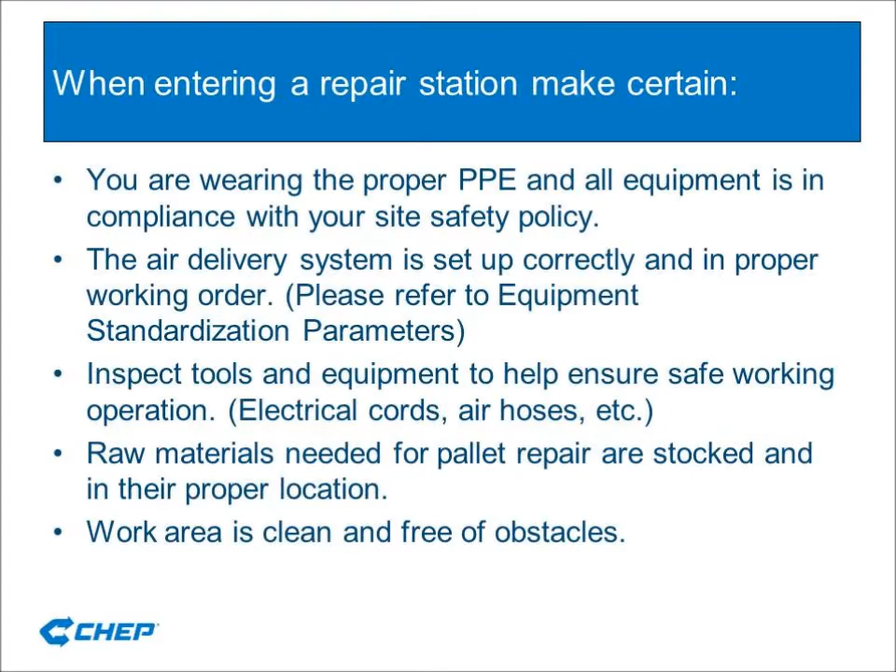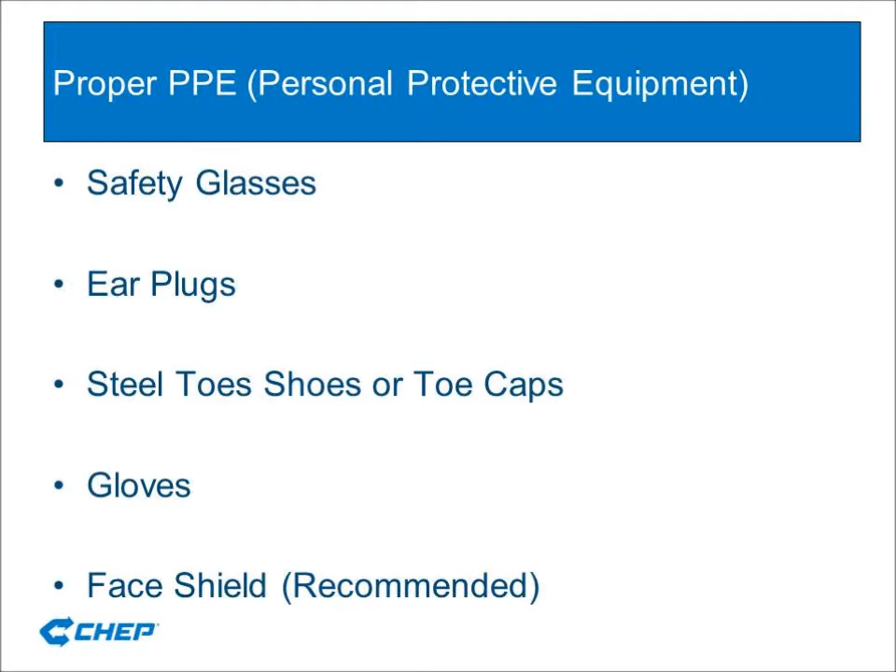Personal protective equipment: safety glasses, earplugs, steel toe shoes, gloves, and face shield. A face shield is recommended but not required in all repair centers. Check with your local management team for PPE requirements.

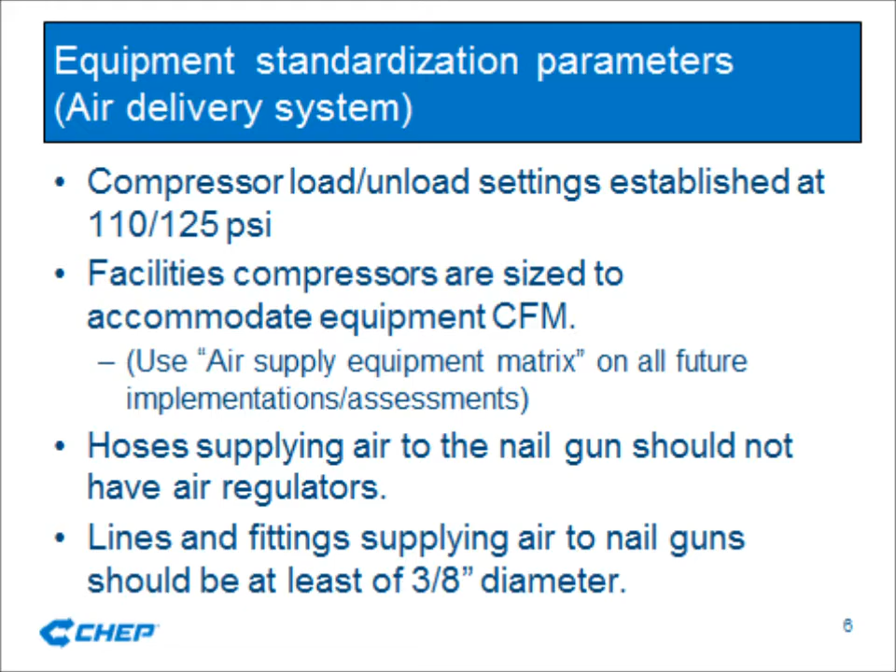Equipment standardization parameters: the compressor load, unload settings established at 110 to 125 psi. Facilities compressors are sized to accommodate equipment CFM. Hoses supplying air to nail gun should not have air regulators. Lines and fittings supplying air to nail guns should be at least 3/8 of an inch in diameter.

Proper nail coil loading. Step 1: disconnect tool from air supply. Always disconnect air supply before making any adjustments, clearing jams, reloading nails, and when tool is not in use.

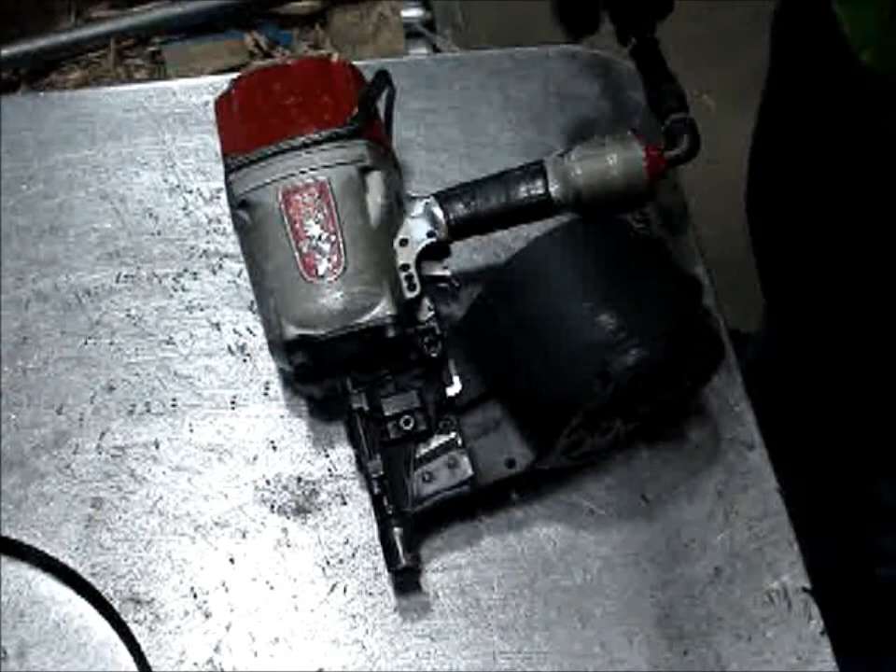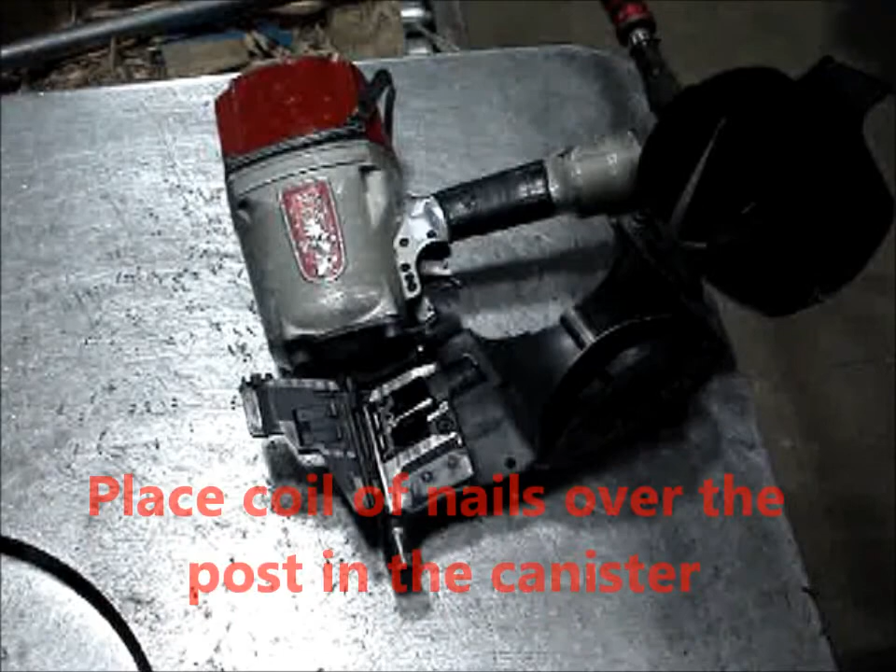Step 2: unlock the cover and open the nail coil cartridge. Step 3: place the coil of nails over the post in the canister. Step 4: uncoil enough nails to reach the feed pawl and place the first nail in front of the front tooth on the feed pawl in the driver channel. The nail heads must be in the slot in the nose.

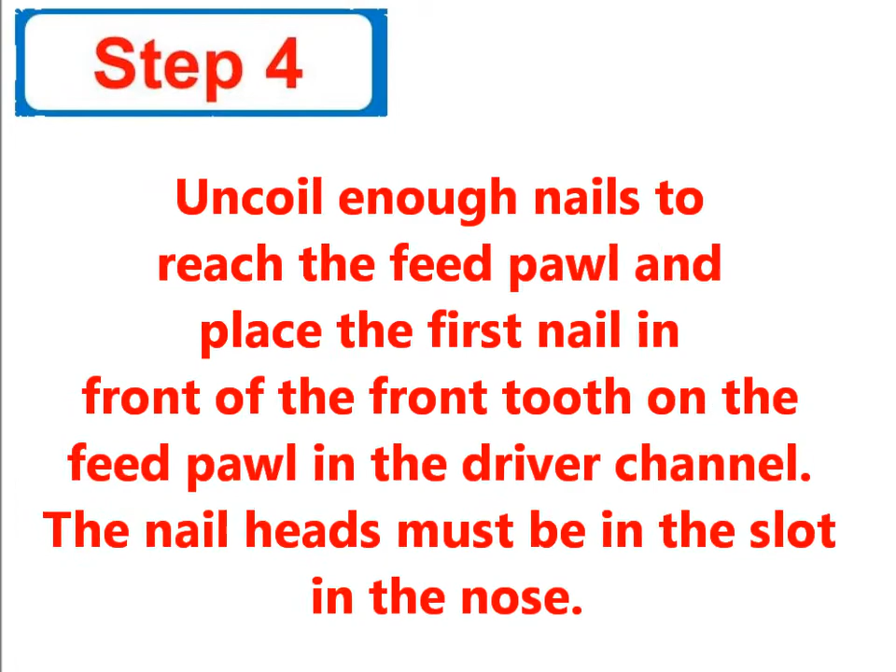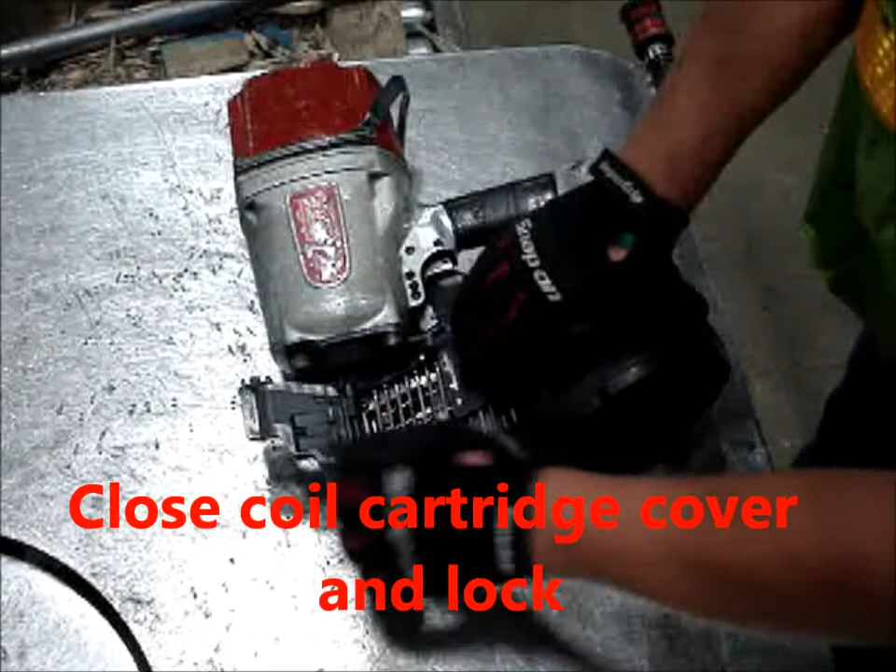Step 5: close coil cartridge cover and lock. Step 6: reconnect tool to air supply.

Proper screw strip loading. Step 1: disconnect tool from electrical outlet. Step 2: to remove empty strip, pull from the top of the nose piece.

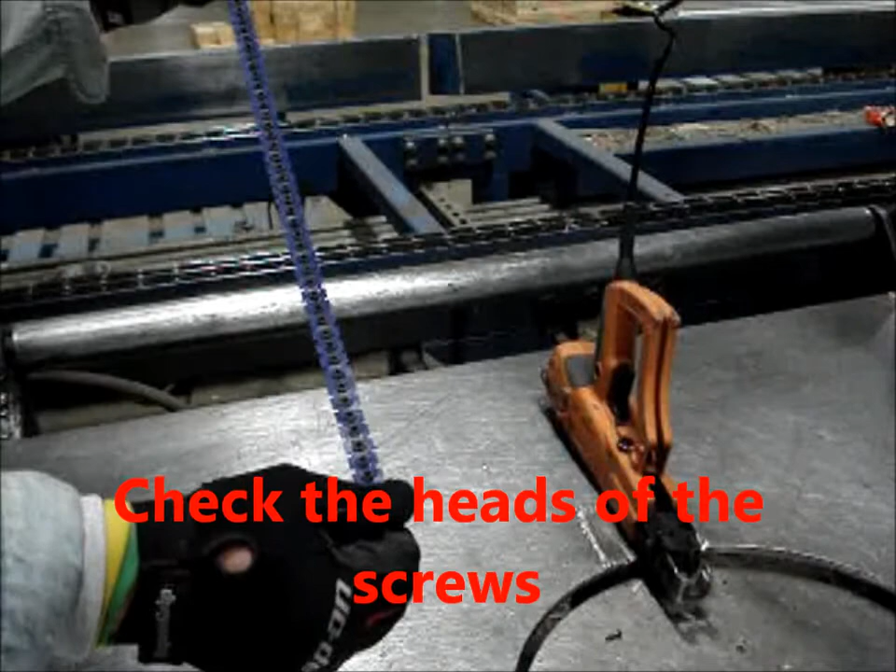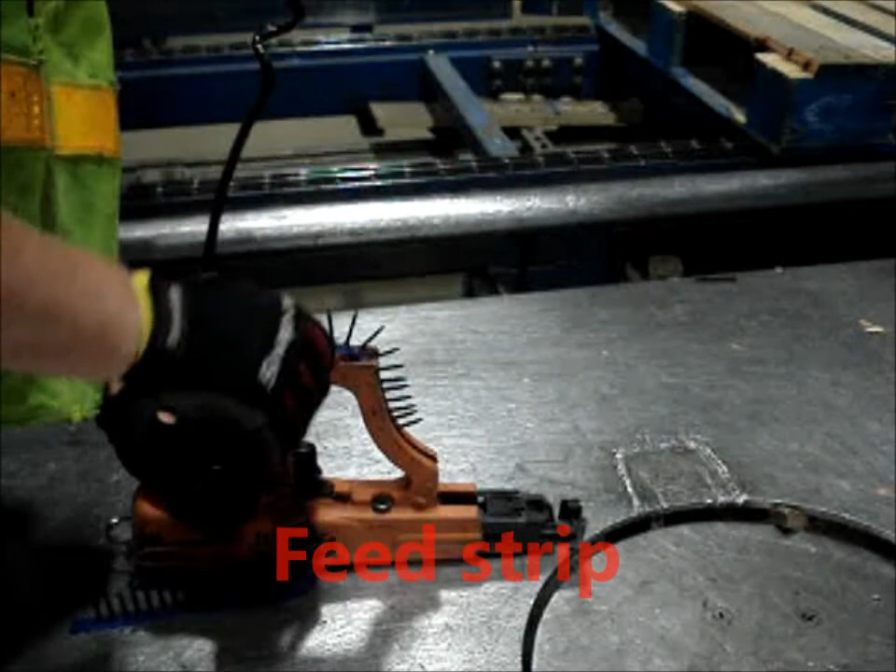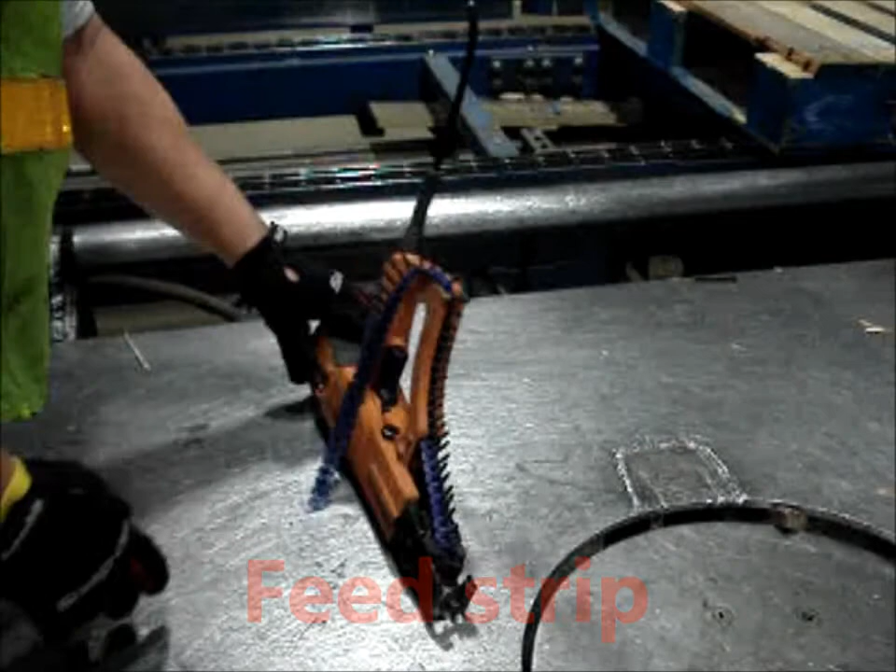Step 3: check to be sure the heads of the screws are resting onto the plastic of the new strip. Step 4: feed the strip up into the strip guide, moving the strip forward until the second empty slot is aligned with the bit. This will allow for the proper strip advancement once the nose piece is depressed. Step 5: reconnect tool to electrical outlet.

Proper nail and screw gun technique. Always grab the nail or screw gun with both hands and point the trigger perpendicular to the board's surface. Avoid excessive nailing. Excessive nailing may damage the components and reduce the durability of the pallet. It also increases repair time, which contributes to higher cost.

In some cases, nailing at an angle may be appropriate to prevent further damage on a loose board or block. Follow the required quality criteria.

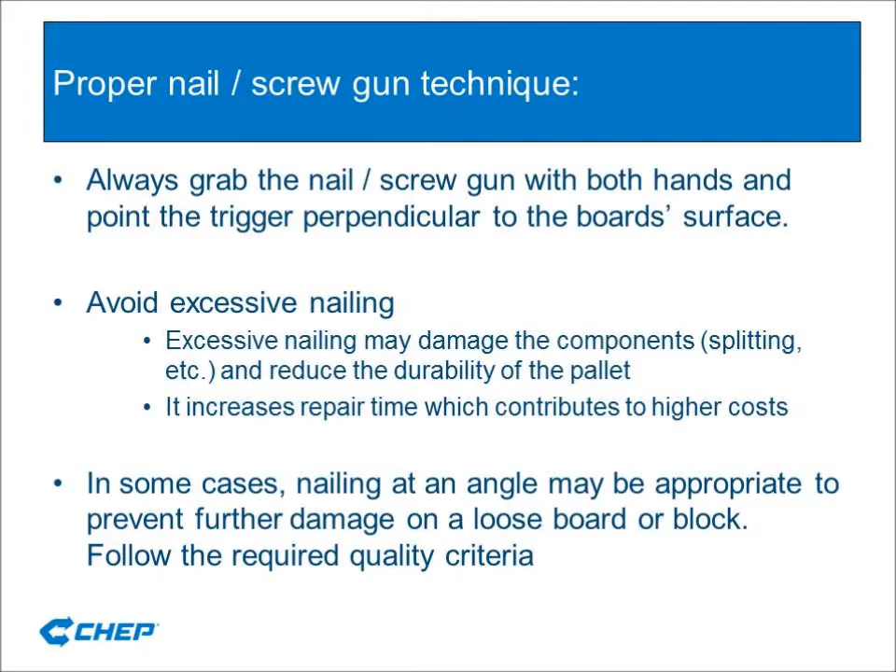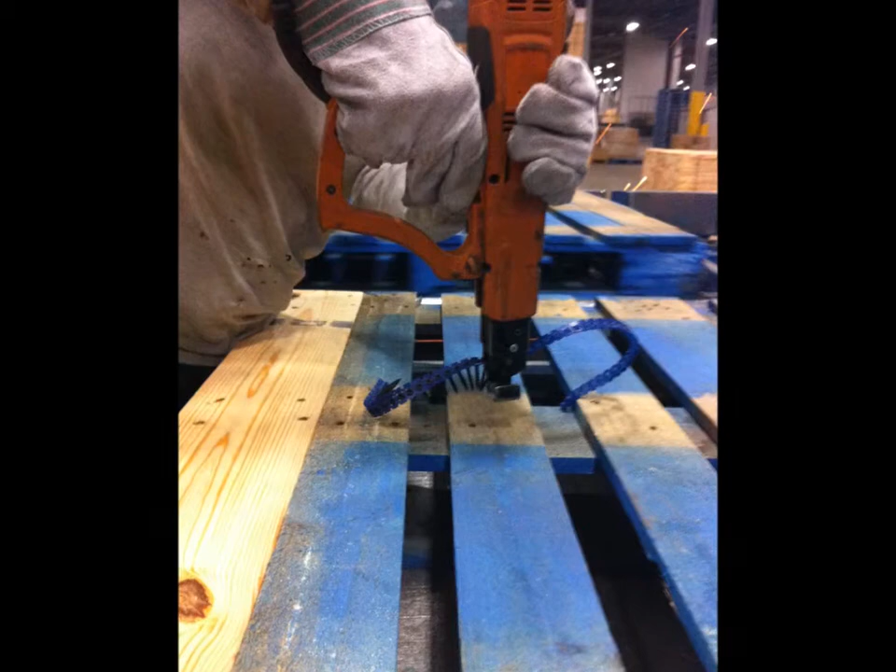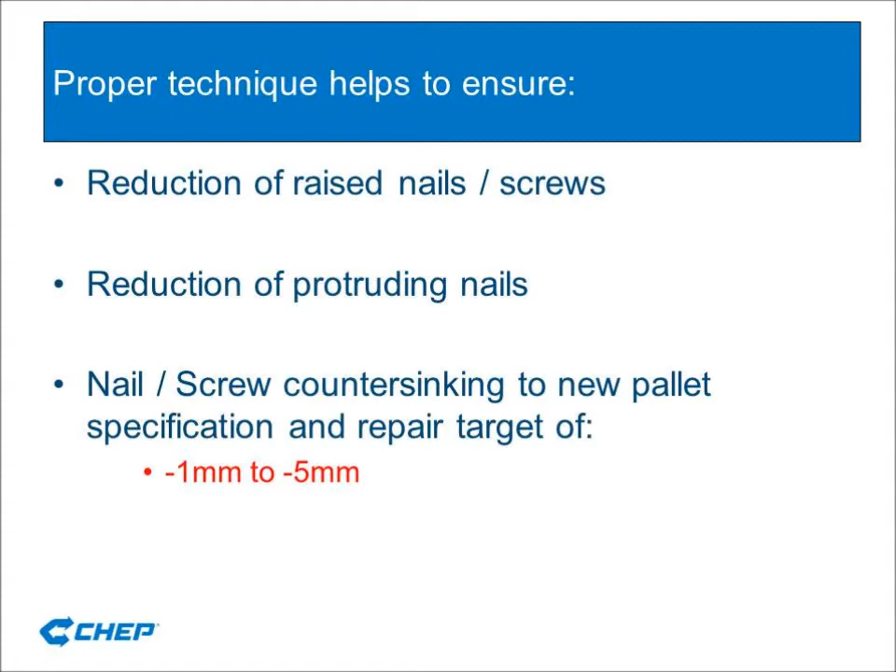Nail and screw countersinking is critical to avoid raised nails. It is also one of the top CTQs for our customers. Use the gauge to check the nail depth consistency in your service center.

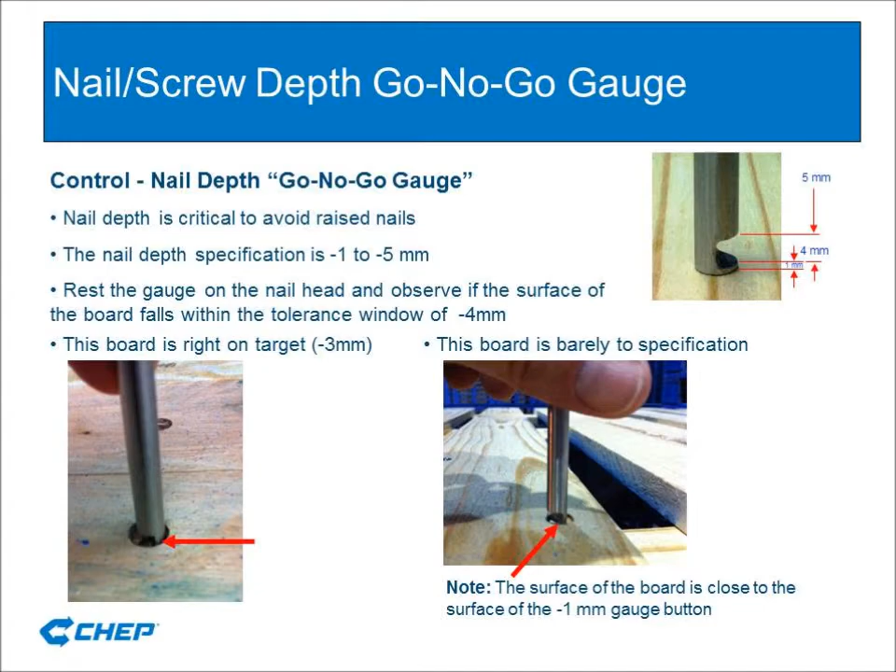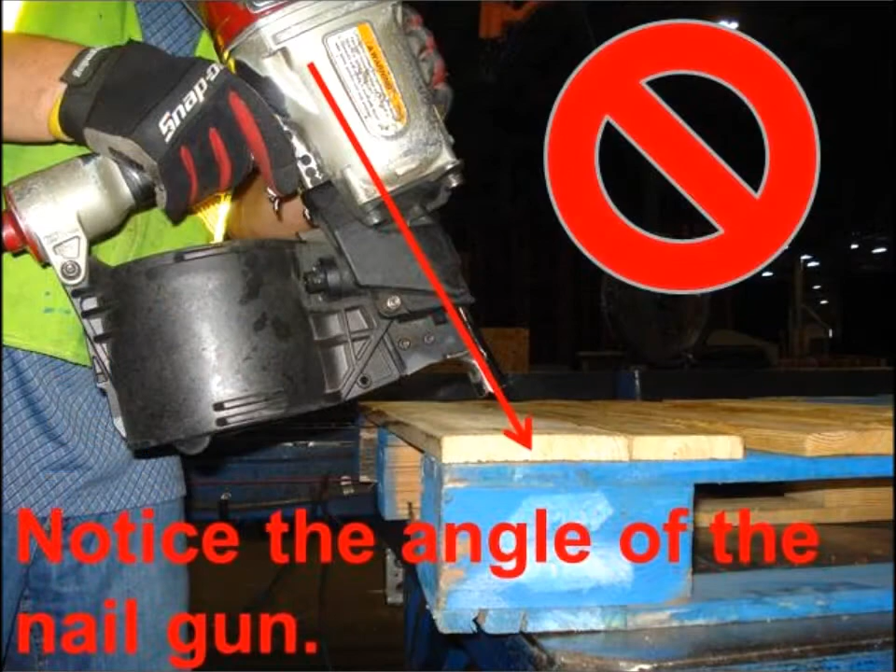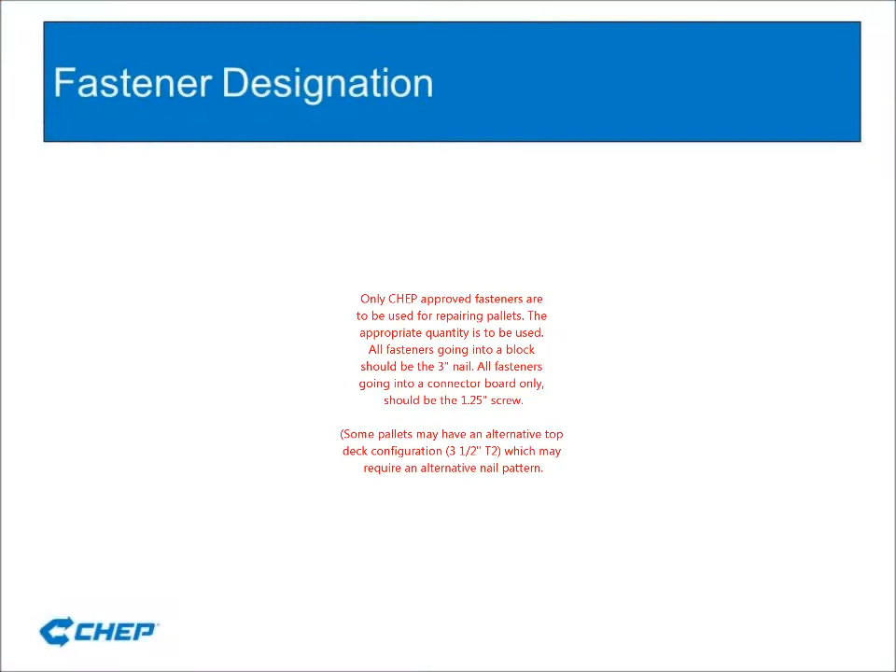Fastener quantity and pattern. The following information refers to the B4840 pallet. There are other types of pallets which will require a different fastener type, quantity and pattern configuration. Only CHEP approved fasteners are to be used for repairing pallets. The appropriate quantity is to be used.

All fasteners going into a block should be the 3-inch nail. All fasteners going into a connector board only should be the 1.25-inch screw. Some pallets may have an alternative top deck configuration, which may require an alternative nail pattern.

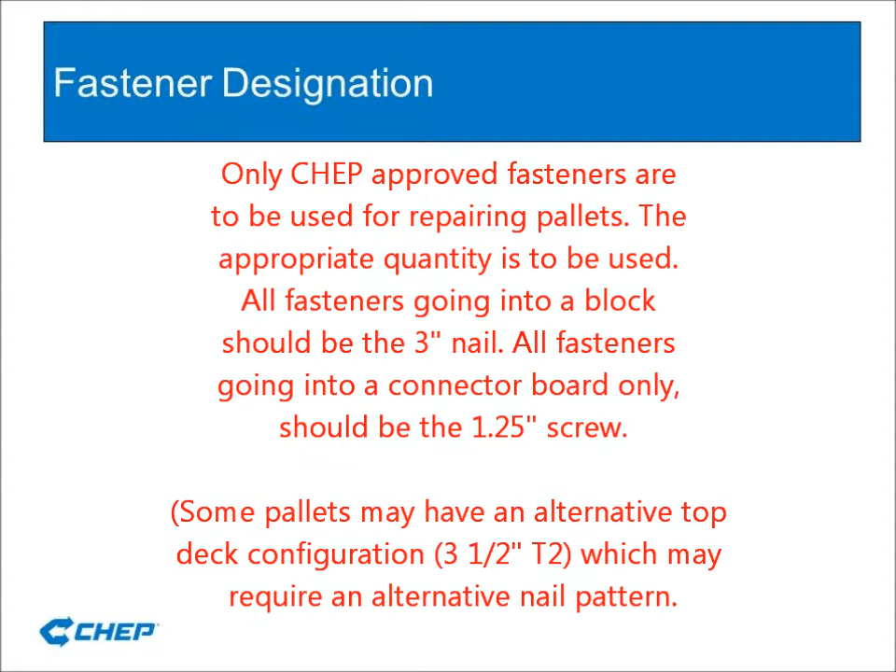Fastener quantity per pallet, top deck: 81 or 75 total fasteners, depending on the pallet configuration. T1: 4 fasteners per joint. T2: 4 fasteners per joint if the component is a 5 1/2 inch T2, and 3 fasteners per joint if the component is a 3 1/2 inch T2.

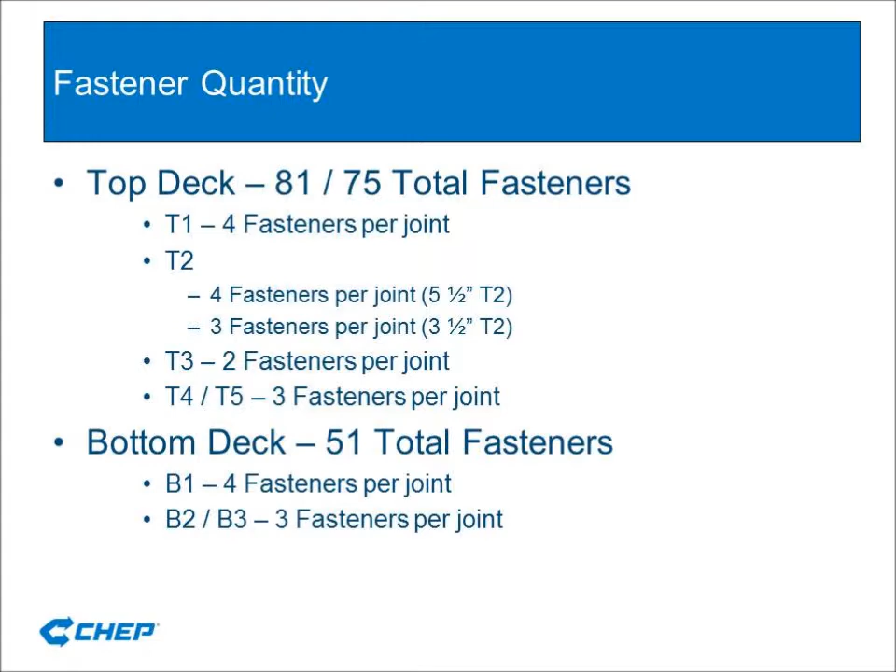T3: 2 fasteners per joint. T4: 3 fasteners per joint. Bottom deck: 51 total fasteners. B1: 4 fasteners per joint. B2 and B3: 3 fasteners per joint.

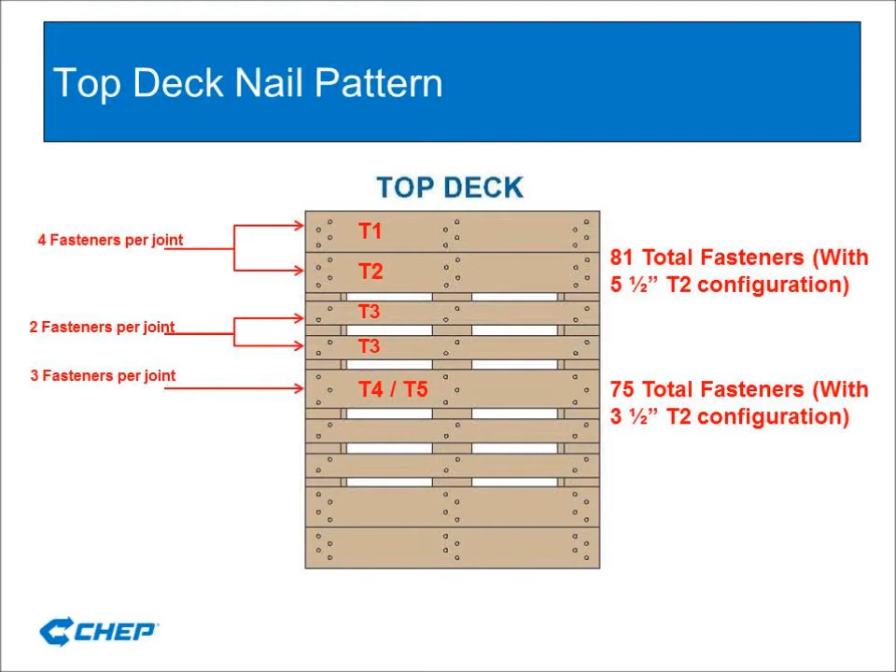As you can see from this top deck configuration, with a 5 1/2 inch T2, there are a total of 81 fasteners. The bottom deck of all repair pallets require 51 total fasteners.

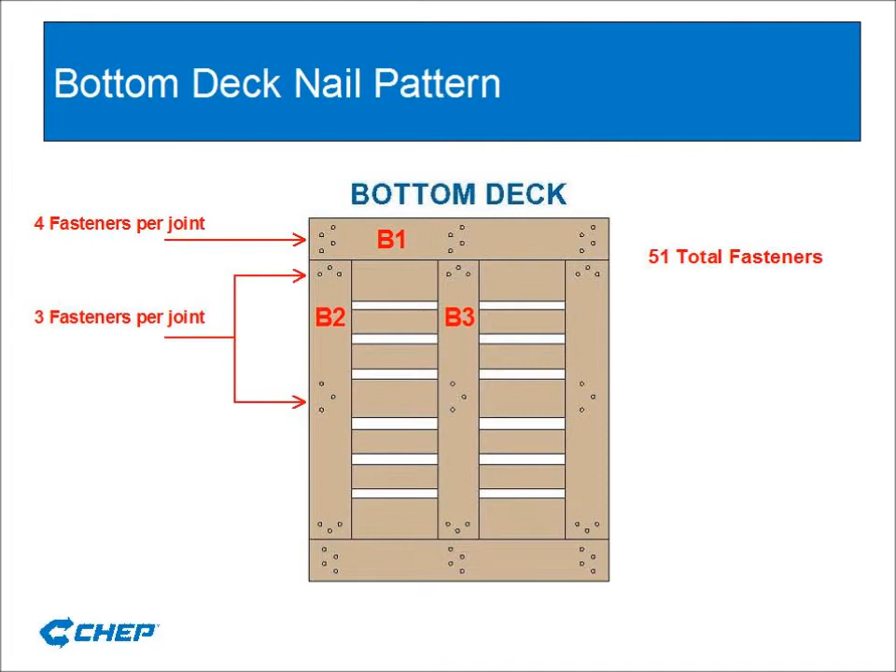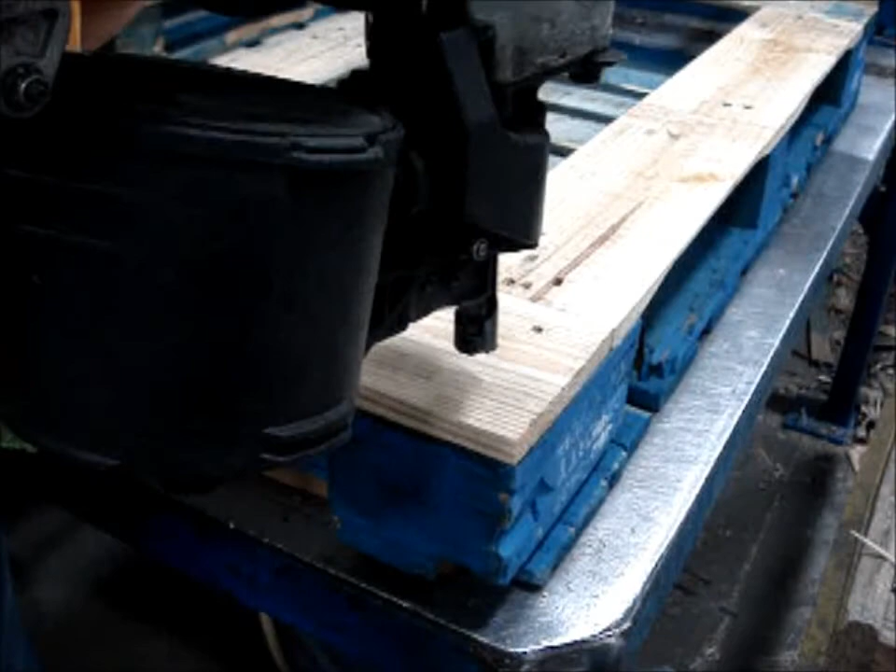B1 nailing technique. Observe how the operator has both hands on the nail gun, and the trigger and nose of the nail gun are perpendicular to the board.

B2 nailing technique. Keeping the trigger and nose of the nail gun perpendicular to the B2 here helps to prevent a protruding nail. Here you can see the offset nail pattern of the B1 and B2.